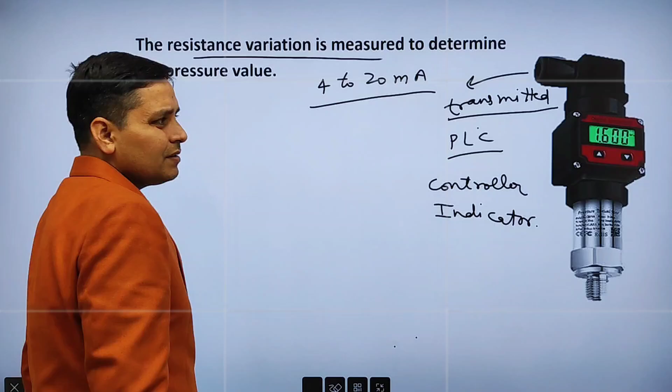This resistance variation is converted into a 4 to 20 milliampere signal, and output is transmitted from here. You can use this output on PLC, on any controller, or any indicator. So this is the simple working of this transmitter.

Hello friends, today we are going to discuss pressure measurement in instrumentation. This video is going to be very helpful for you, so don't skip the video.

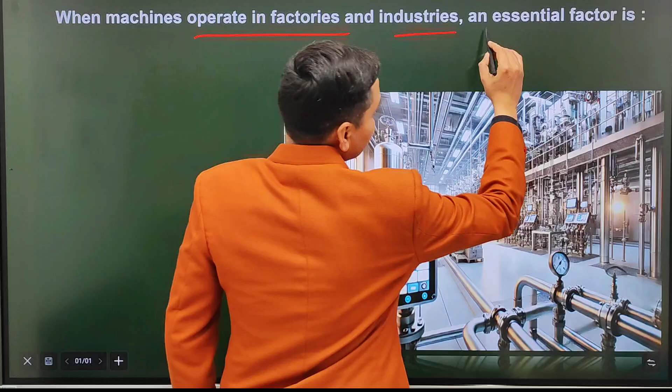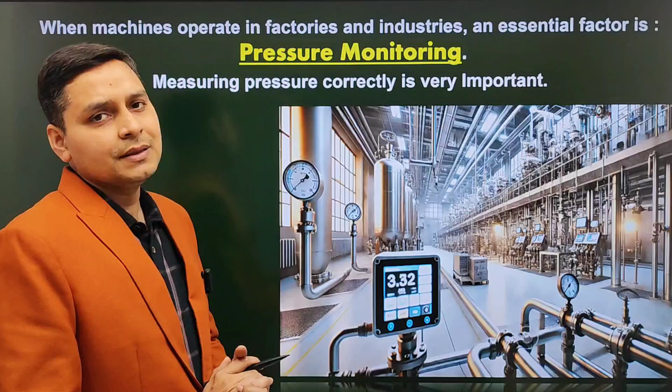Look friends, when machines operate in factories and industries, then an essential factor is pressure monitoring. And measuring pressure correctly is very important. If we do not measure the pressure correctly, then the machine may fail. How? Let's discuss. Every machine has a set limit for its pressure.

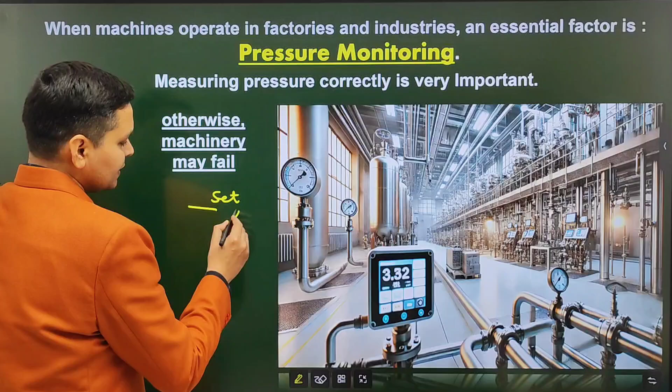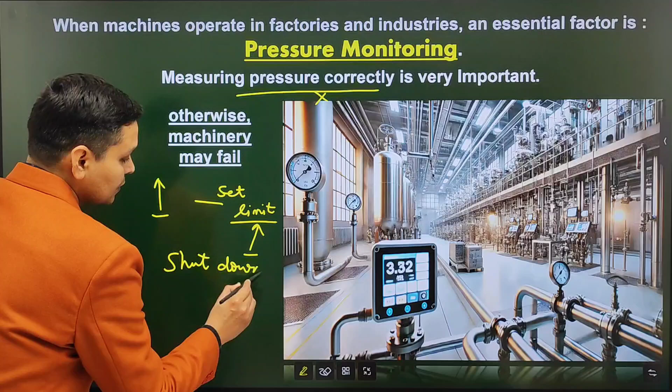Suppose we are not measuring the pressure correctly, then the pressure will increase. And if this pressure increases beyond the set limit, the machine may fail or there may be a shutdown. So the complete system may be shut down. And due to this shutdown and machine failure, an accident may occur. So measuring pressure correctly is very important.

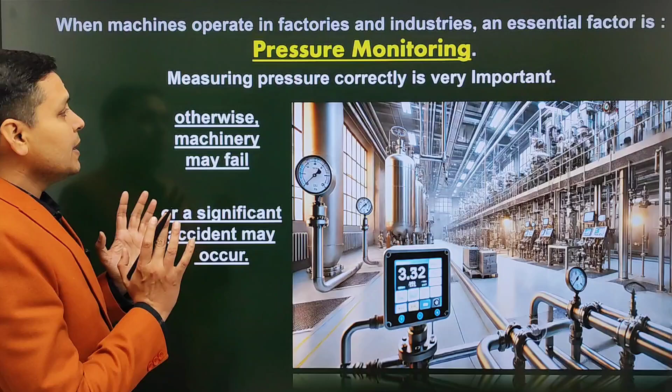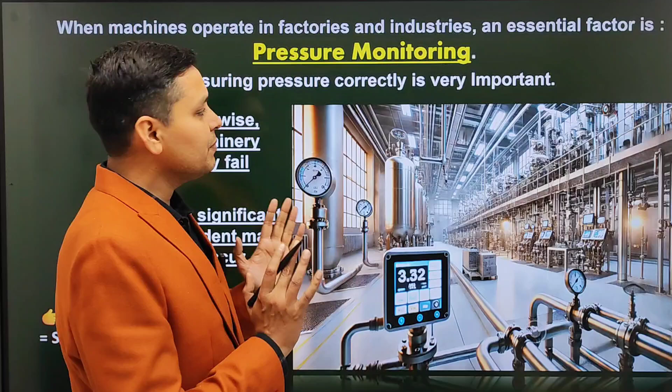One more important point: correct pressure measurement equals safe and efficient operations. When we measure pressure correctly, operations will be safe and efficient. When we measure pressure in instrumentation, pressure transmitters are used for monitoring, measuring, and controlling the pressure.

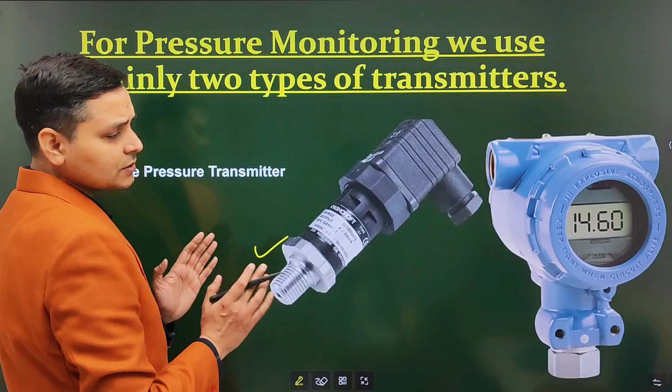Mainly two types of pressure transmitters are used. The first one is the pen type pressure transmitter. Friends, this is called pen type pressure transmitter because it looks like a pen. And the other one is the smart pressure transmitter. This one is a smart pressure transmitter.

This transmitter also has a display, and here you can see what parameter is going on in the process. And other than the parameter, it will also show some other information. Friends, first we will discuss this pen type pressure transmitter.

Friends, it is a basic and simple device that measures pressure and converts it into an electrical signal. It is installed where we need to measure the pressure, and its output is an electrical signal, which is nothing but a 4 to 20 milliampere signal.

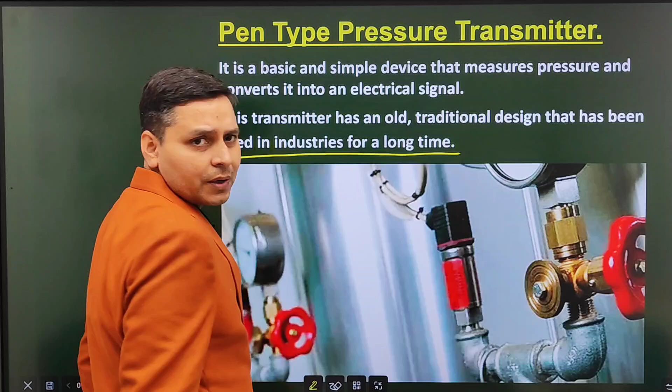Next, look friends, this transmitter is an old traditional device, and it has been used in industries for a long time.

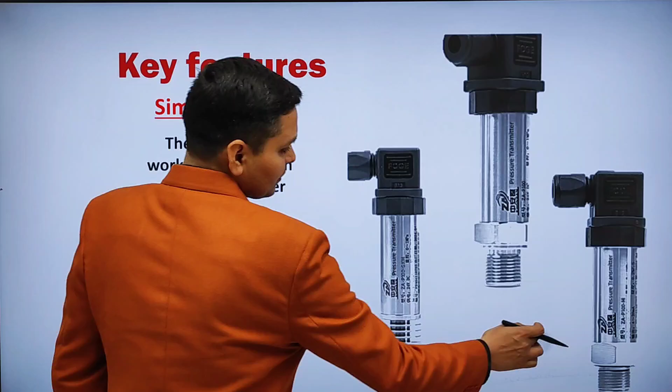Now let's discuss some key features of this transmitter. First key feature is its simple design. As the name suggests, the design and working mechanism of this transmitter is very simple. Here you can see the pen type pressure transmitter looks like this, and from here connections are made.

Here, look friends, two wire connections are used for this transmitter. Two wire means only two wires are used for supply and signal.

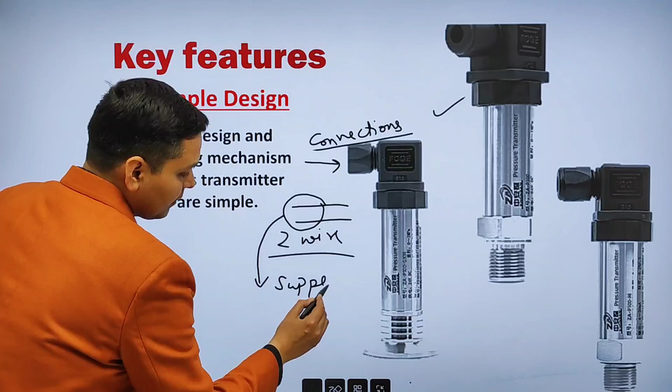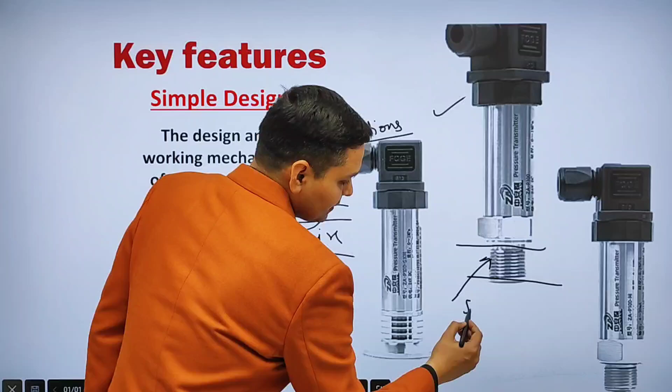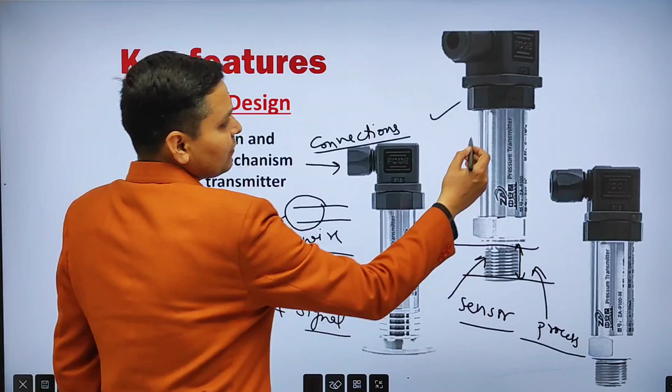Here you can see this is its sensing part. Here the sensor remains, and from here it is inserted into the process. Where we want to measure the pressure, we will insert this transmitter from this part. And here you will find its range is written, and also its output is written.

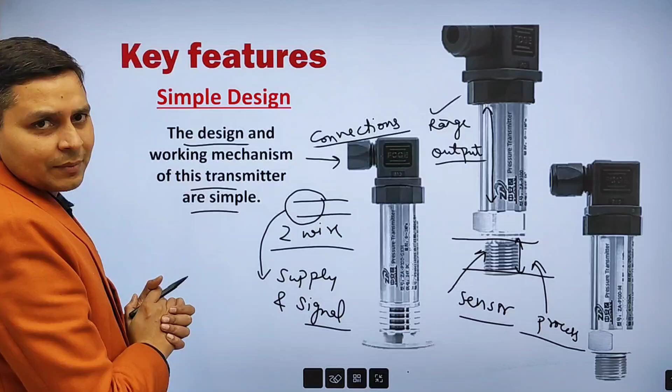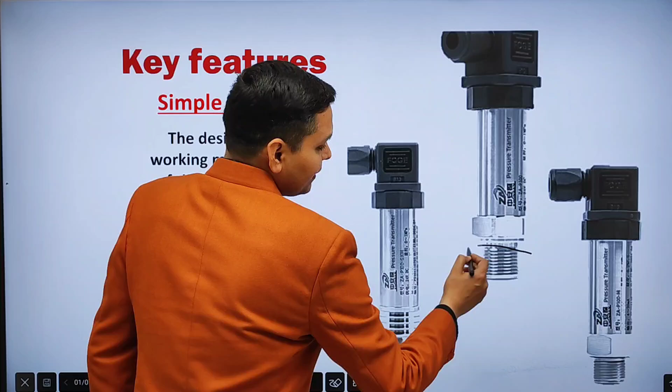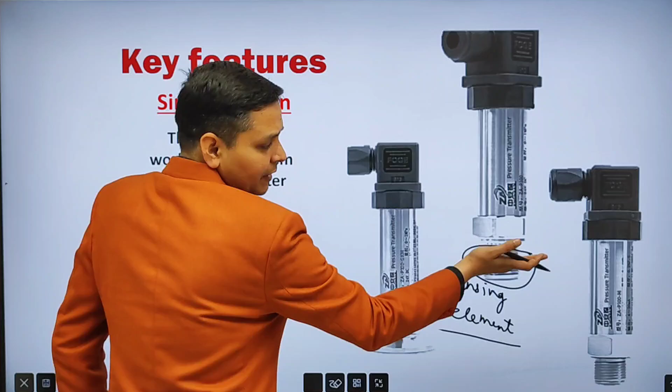So its design is very simple, and we will discuss its working mechanism also. Look friends, it contains a sensing element that detects pressure. We have discussed that here it contains the sensing element or sensor. Because it is inserted from here into the process, from here it detects the pressure. I think it is clear to you.

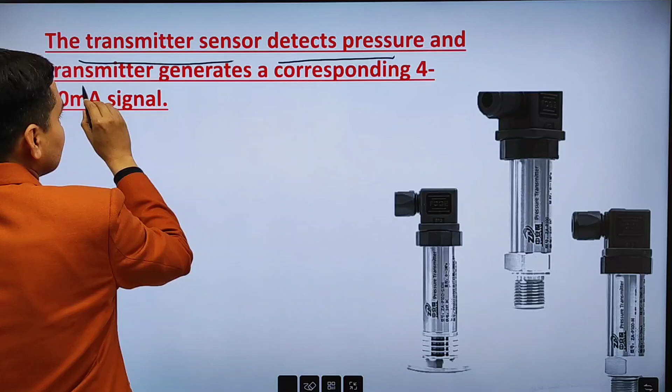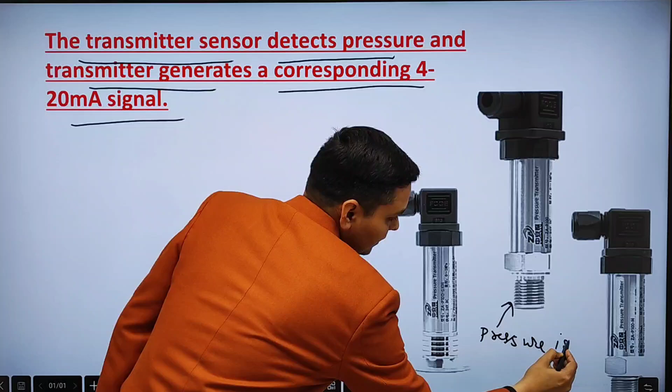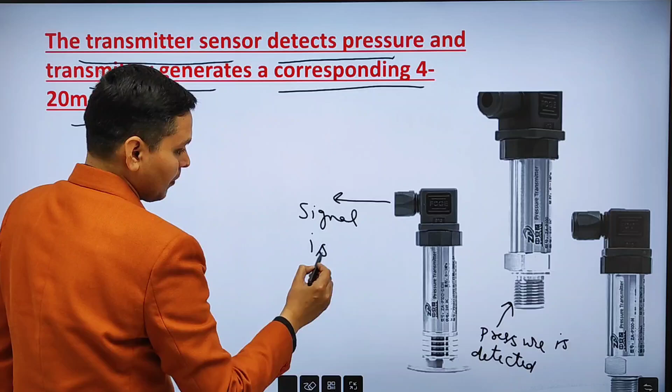Now look friends, this is an important point, please note it down: the transmitter sensor detects pressure and the transmitter generates a corresponding 4 to 20 milliampere signal. From here, pressure is detected, and from here, signal is generated. Now I think it is clear to you from where it detects the pressure and from where the signal is generated, and this generated signal is nothing but a 4 to 20 milliampere signal.

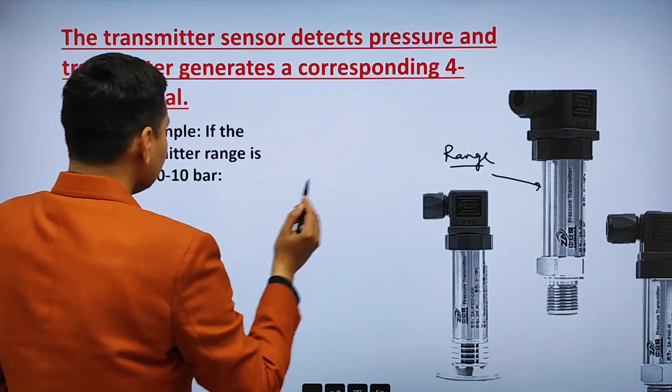Now friends, let's take an example. Suppose the range of the transmitter is 0 to 10 bar. So you can find here the range is written. So if the transmitter range is 0 to 10 bar, here you will find 0 to 10 bar is written.

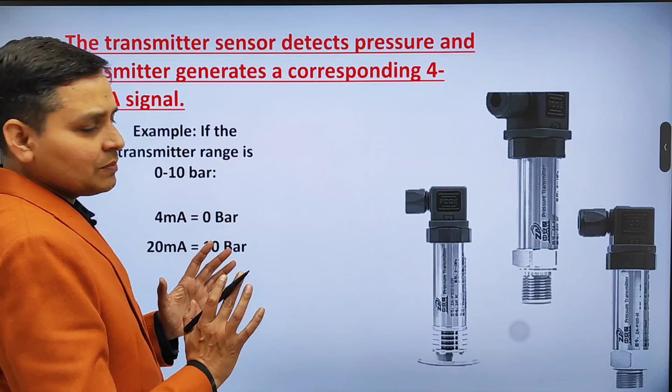Now the transmitter output is a 4 to 20 milliampere signal. So at 0 bar the output will be 4 milliampere, and at 10 bar the output will be 20 milliampere.

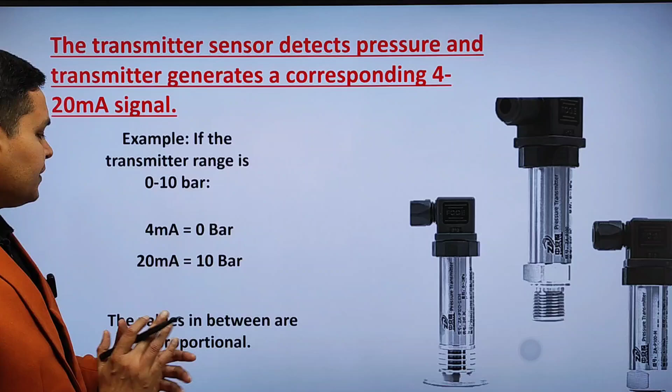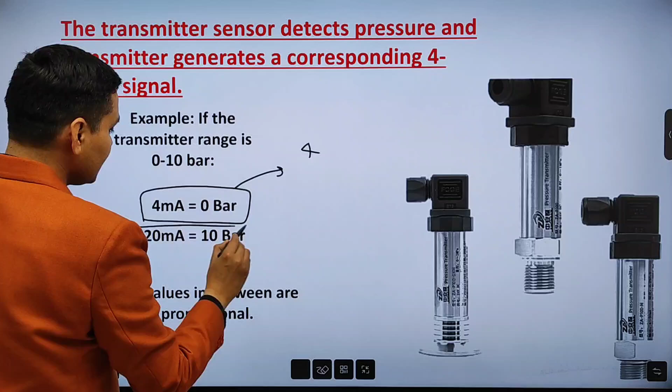Now friends, the values in between are proportional. What does it mean? At 0 bar the output is 4 milliampere, at 10 bar the output is 20 milliampere. Now what about the in between values between 4 and 20 milliampere?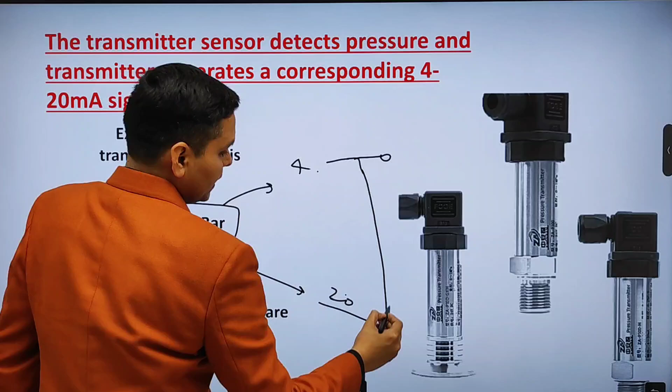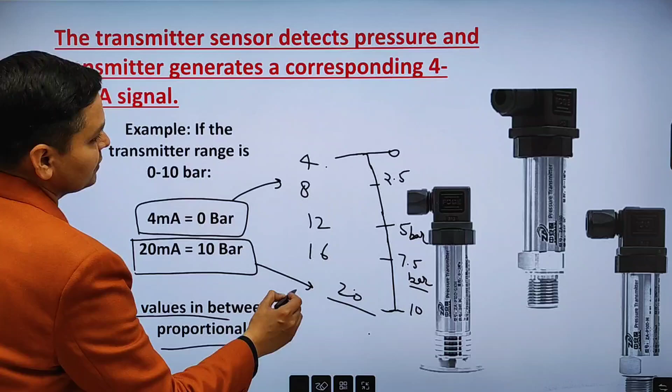At 12 milliampere it is 5 bar, at 8 milliampere it is 2.5 bar, and at 16 milliampere it is 7.5 bar. So the values in between are proportional according to this table. I think it is clear to you.

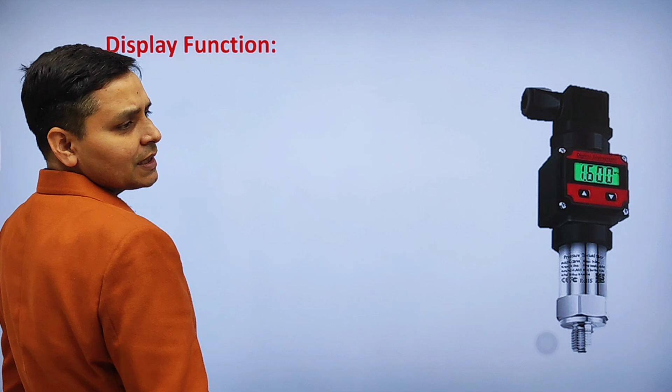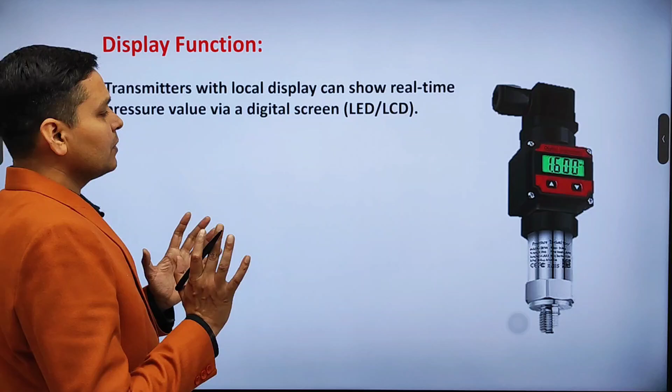Now another important part is the display function. Look friends, some transmitters have a small display attached with them, as you can see in this transmitter. The transmitters with local display can show real-time pressure values via a digital screen. So here you can see the real-time pressure value.

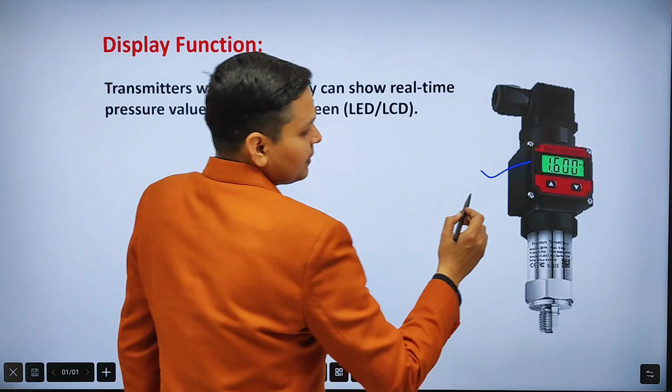Here you can see it is 1.600. That means the real-time pressure value is 1.600.

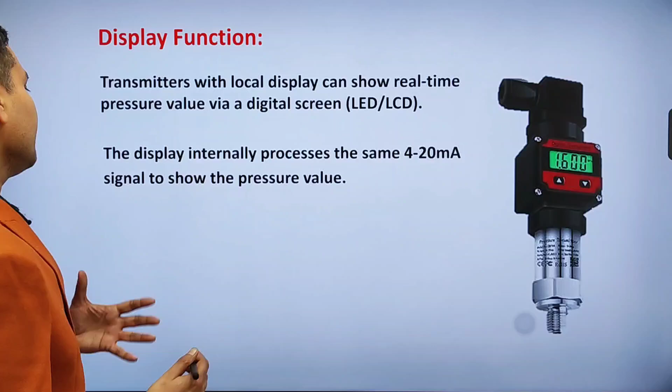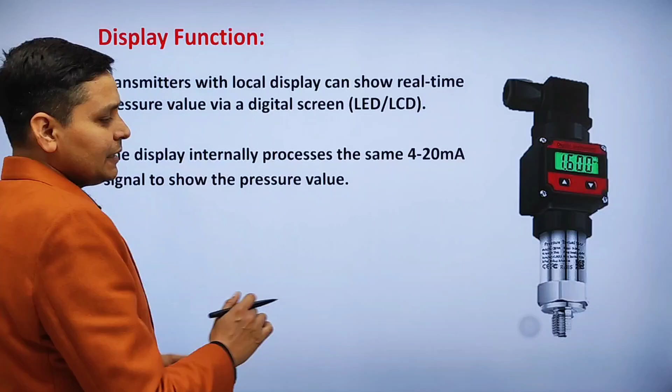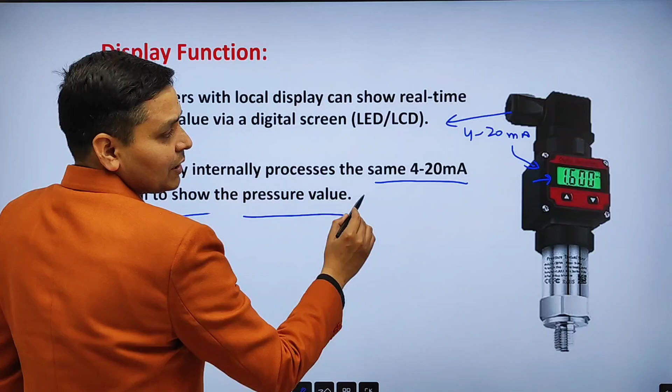Look friends, the display internally processes the same 4 to 20 milliampere signal to show the pressure value. The transmitter output is a 4 to 20 milliampere signal that is given from here, and this 4 to 20 milliampere signal is also shown here on the display. According to this signal, the pressure value is shown here.

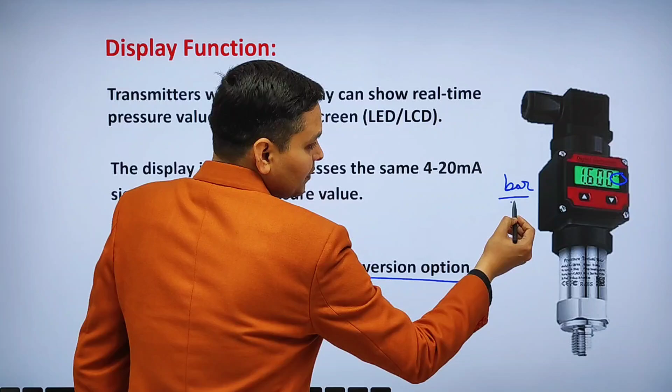Look friends, some models have a unit conversion option. If you are showing the unit as bar here, in some models you also have an option of unit change. That means you can change it into PSI, kg per centimeter square, and you can change it into some other unit also.

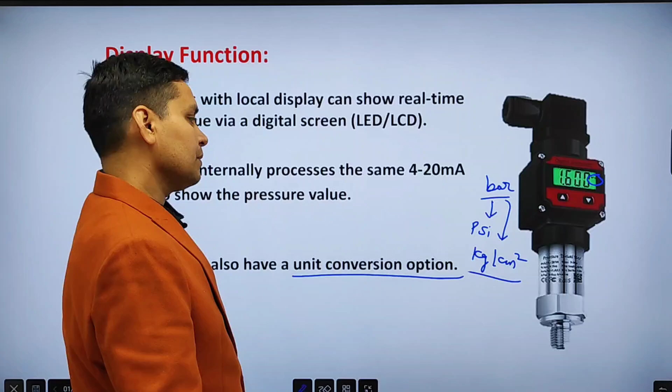Now we will discuss the working principle of pen type transmitter. Pressure transmitter working principle is asked in many interviews. This device operates on strain gauge principle. Please note it down, its working principle is strain gauge principle. Now let's discuss what is this strain gauge principle.

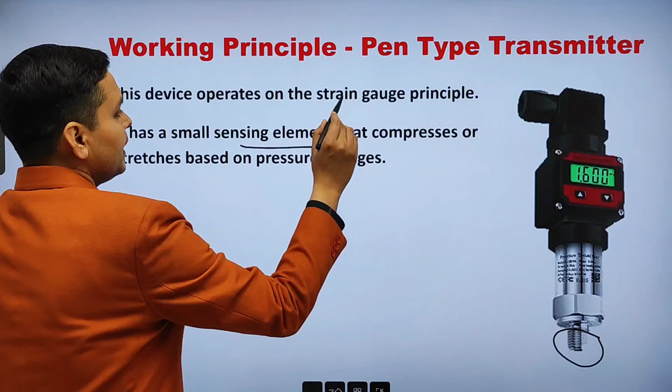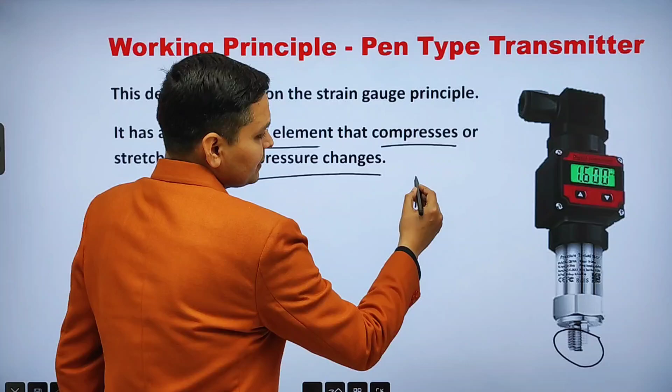Look friends, as we have discussed, it has a sensing element. This sensing element compresses or stretches based on pressure changes. As pressure increases, this sensing element will stretch, and when pressure decreases, this sensing element will compress.

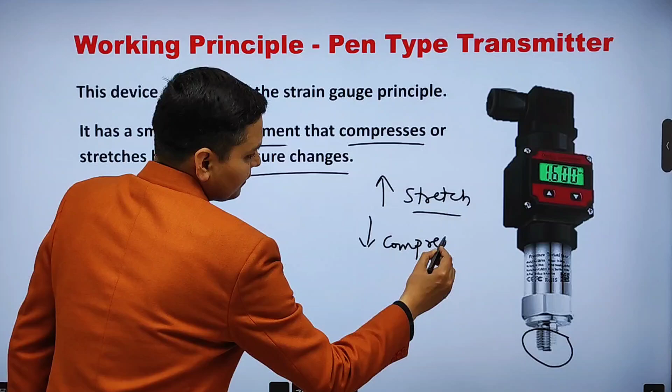When the sensing element stretches, its resistance changes. It is an important point, please note it down. When sensing element stretches, its electrical resistance changes. This resistance variation is measured to determine the pressure value, or you can say this resistance variation is converted into a 4 to 20 milliampere signal, and output is transmitted from here.

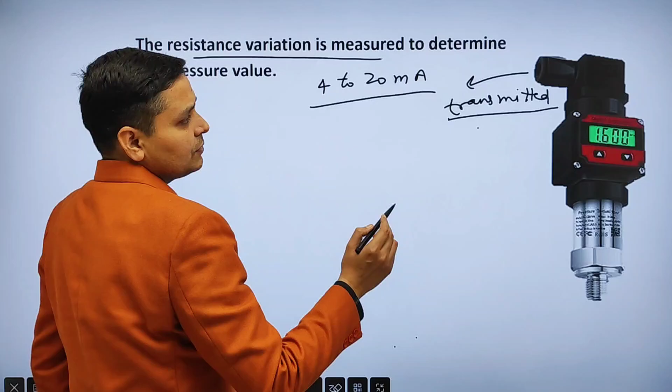You can use this output on a PLC, you can use this output on any controller or any indicator. So this is the simple working of this transmitter.

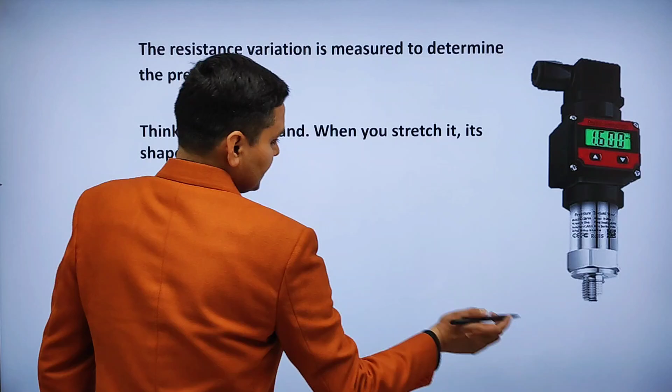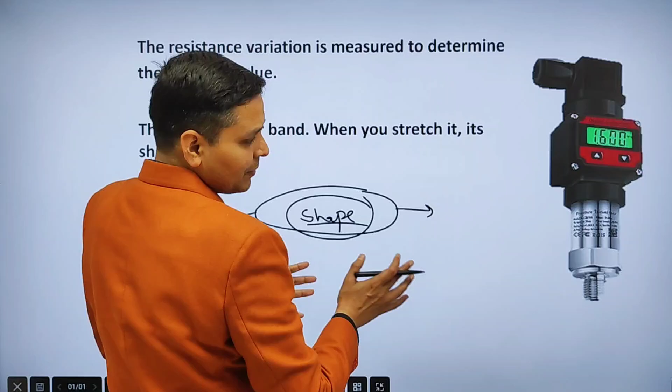Suppose we have a rubber band, and when we stretch it, it will change its shape. Similarly, here when the sensing element is stretched, its shape will change. A pen type transmitter works in the same way.

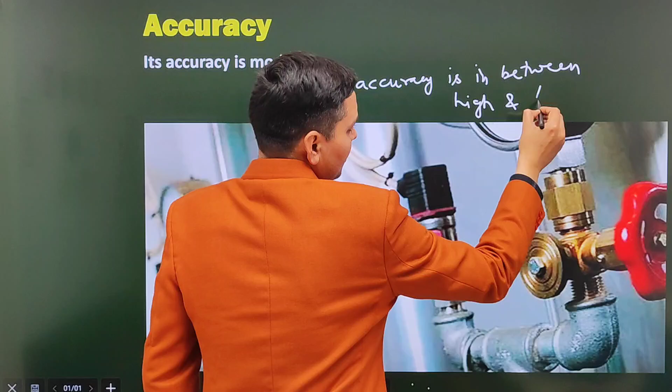Now, if we talk about its accuracy, then its accuracy is moderate. You can write it down as its accuracy is in between high and low. So it has a moderate accuracy. Look friends, it is not designed for high accuracy and precision work. So it is also an important point, you can note it down.

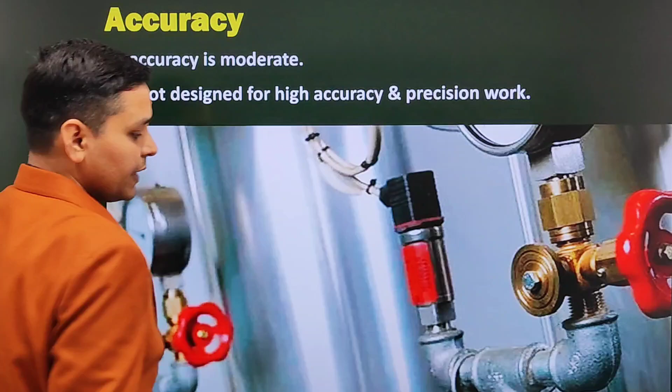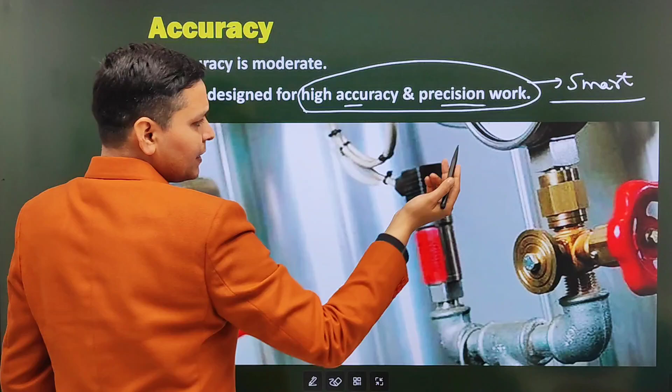For high accuracy and precision work, we will use smart transmitters. Where high accuracy or precision is not required, then we will use this type of transmitter. I think it is clear to you.

Now friends, we will discuss the smart pressure transmitter. It is a modern and advanced device, and it is not limited to just measuring pressure. It is an important point, and the main difference between a smart transmitter and a pen type transmitter, because this transmitter is not limited to just measuring pressure. Pen type pressure transmitter is limited to just measuring the pressure only.

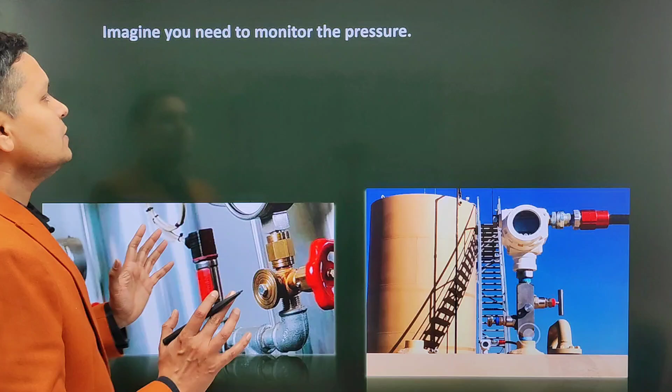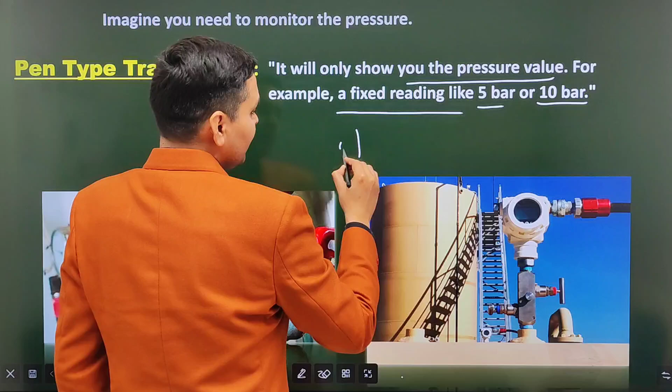Now, suppose we are monitoring the pressure. We will discuss this when using the pen type transmitter, and after that using the smart transmitter. If we are using the pen type transmitter, it will show you the pressure value as discussed, for example a fixed reading like 5 bar, 10 bar, or whatever is the pressure between 0 to 10 bar. It will show you here on the display. The transmitter having the display also transmits this value to any PLC, controller or indicator.

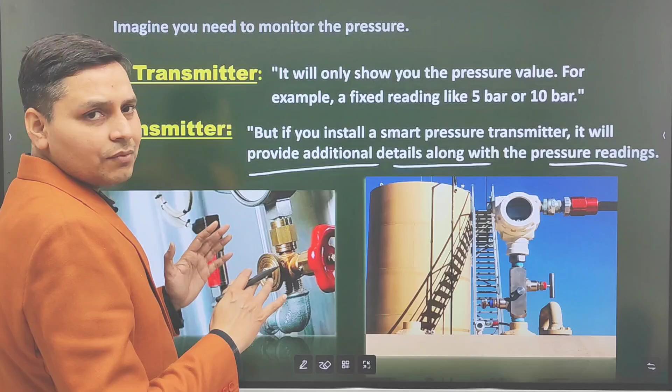But when we use smart transmitters, then it will provide additional details along with the pressure readings. Now we will discuss what are these additional details.

Look friends, smart transmitters can transmit data via analog and digital protocols. So it is an important point, please note it down. And another difference is smart transmitters can adjust pressure measurement.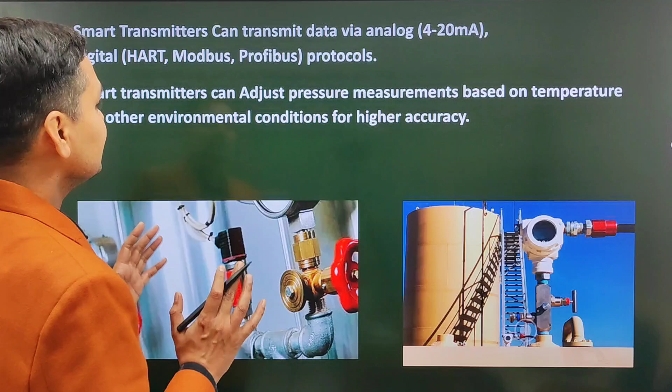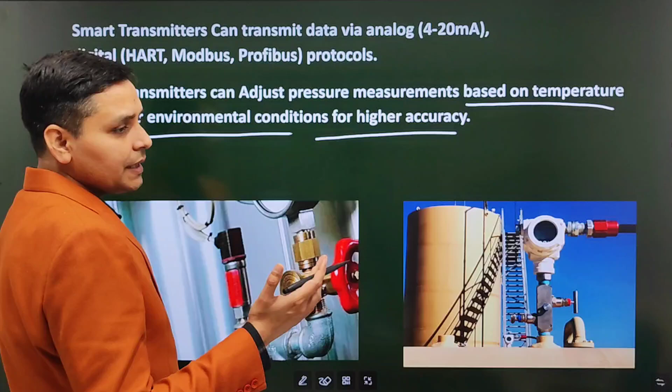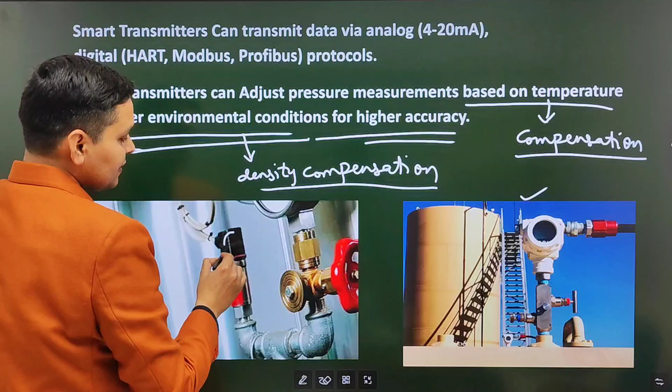Based on temperature and other environmental conditions for high accuracy, it means that for high accuracy, the smart transmitters provide temperature compensation and other environmental conditions compensation also, like density compensation. But in pen type transmitters, this feature is not available. So this is the big advantage of using smart transmitters.

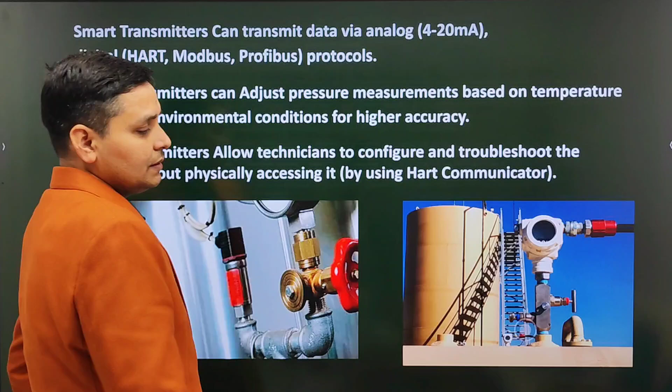Look friends, it is also an important point, smart transmitters allow using a HART communicator. By using a HART communicator in smart transmitters, we can configure and troubleshoot the device. So HART communicators can be used with smart transmitters.

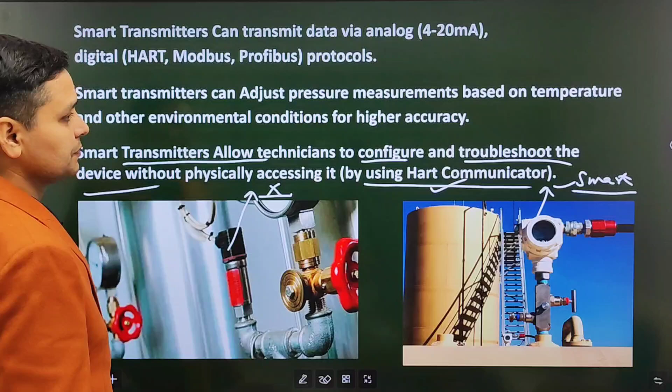But in most pen type transmitters, HART communicator is not used. So this was our video. Thanks for watching.